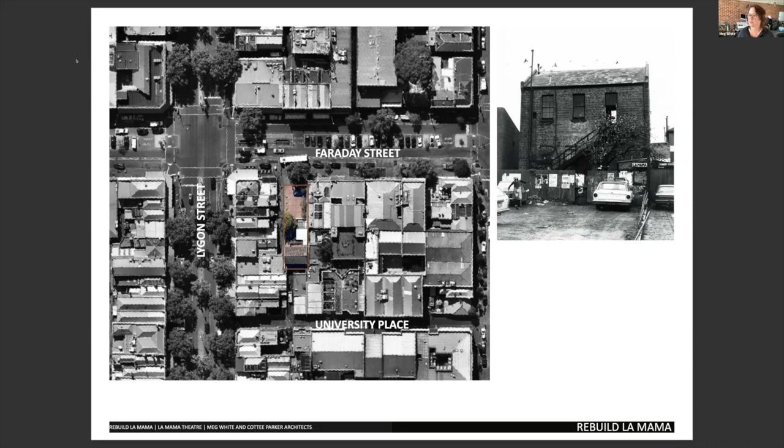Liz Jones, artistic director of La Mama, gave this description of the iconic theatre on the day it was gutted by fire. It's a very small space, but it had a very big history, and it's a very, very important place in the heart of the creative community in Australia.

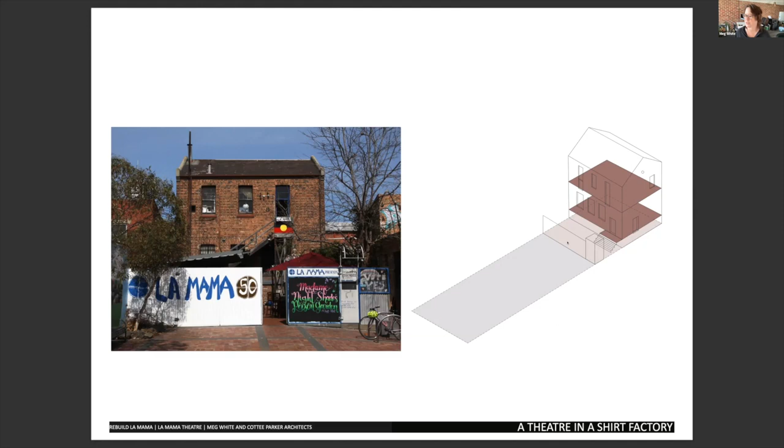A theatre in a shirt factory is an unusual proposition. The small two-storey red brick building has a footprint of just 55 square metres. There was a small courtyard preceding the building. Then in later years, when the community purchased the site, a forecourt was formalised. The ground floor theatre space has 5 doors and 5 windows, a set of stairs, a fireplace and a hatch.

The upstairs space accommodated up to 8 staff, makeup, costume and green room space for untold numbers of performers, technical storage, a dunny and a kitchenette. La Mama has been the home of experimental theatre for more than 50 years. Improbable as it all might seem, this tiny programmatically overloaded footprint has nurtured hundreds of creatives, including writers, directors, actors, designers, technicians, filmmakers and poets.

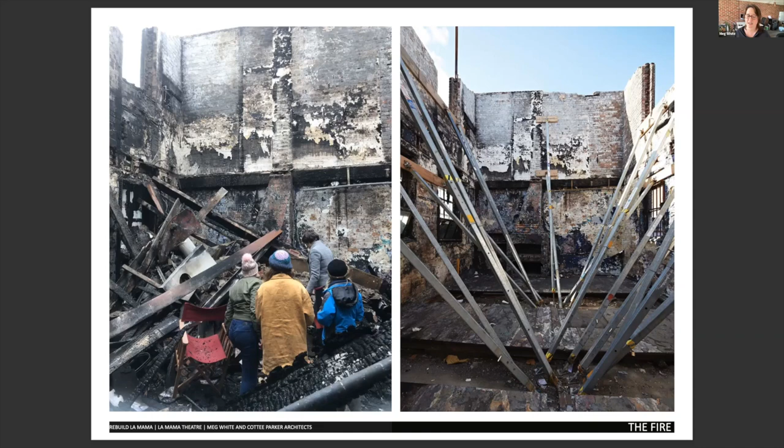In May 2018, this creative engine room was gutted by fire. Very little remained. The loss was devastating to all. There was an immediate decision to rebuild. The regenerative notion of the Banksia releasing its seed for new growth after devastating fire was harnessed. The tragedy slowly revealed itself as an unbidden opportunity to grow and evolve.

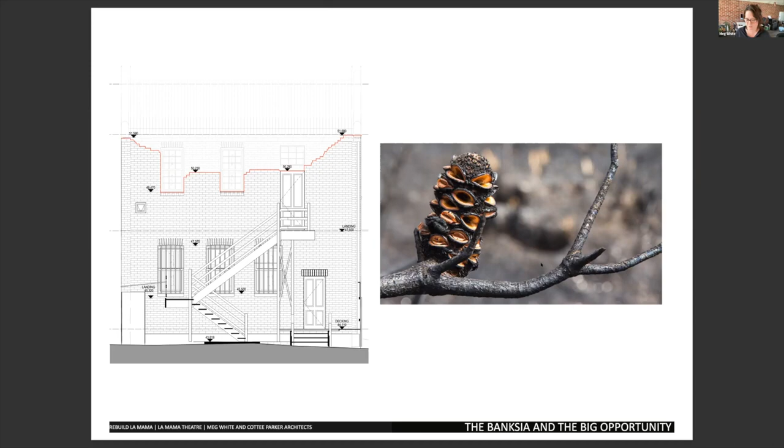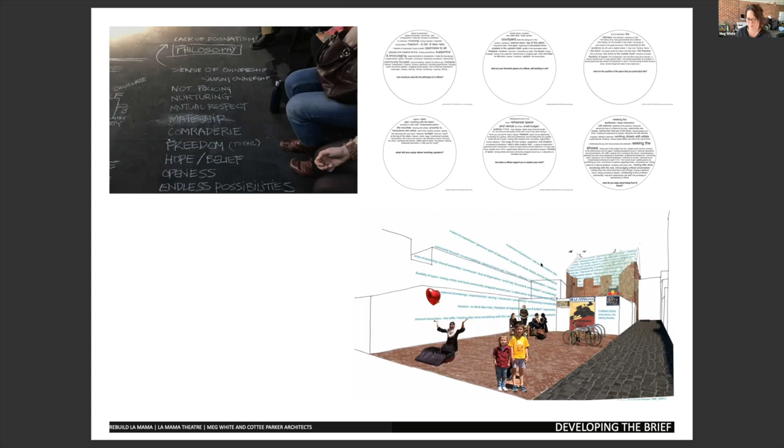The brief was woven from engagements with staff and key La Mama creatives. Responses to questions about the theatre, her spaces, and her philosophy were used to generate a script for the rebuild. The wish list included restoration of the theatre space and building volume, accessibility for all, dedicated office and rehearsal hub, extra spaces and improved amenities for staff, artists and patrons, including 2 DDA toilets, a shower for performers and a kitchen shared between the artists and the staff. Modernised technical facilities, improved box office and storage and planet-friendly initiatives.

The principal design gestures began with extending the theatre entry landing, shown here, into a raised deck across the courtyard. This gesture moves the stairs away from the theatre entry, reducing congestion. A lift to the theatre level sits adjacent to the stairs. A second lift provides access to the first floor for staff and artists.

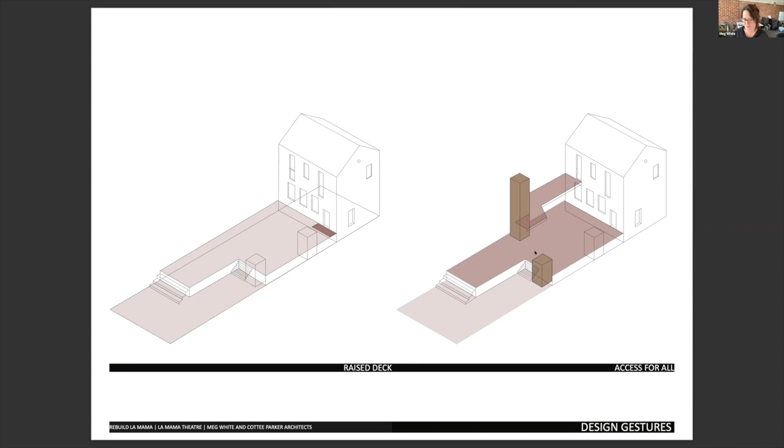Additional spaces include a rehearsal hub and dedicated office in this new volume, and a mezzanine that was tucked up in what would have been the ceiling space in the old building. And of course, that raised deck offered lots of opportunities to tuck services and storage below. A box office sits between, and a bridge link joins and separates the 2 buildings.

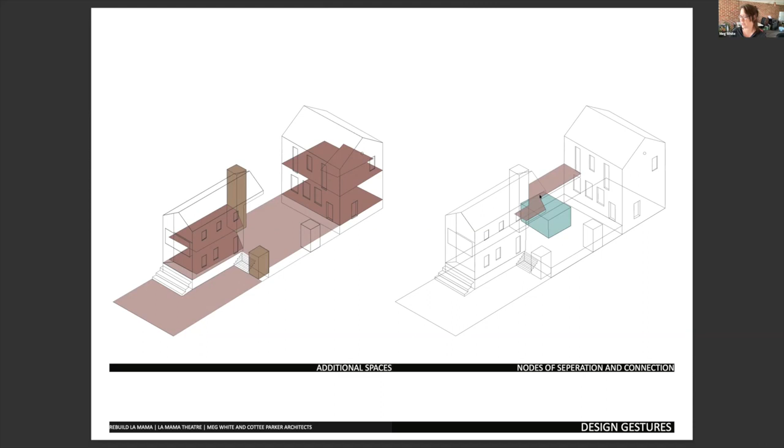The new building is designed as an echo of the original. It is a smaller version of the gabled roof form, rotated 180 degrees and set downstage to allow views through to the old building. You can see a view going there with the entry from the street frontage. The bridge link affords further space for interactions and a veggie patch for supporting healthy shared meals.

For the new building, mottled bricks were selected to reflect the mottled bricks of the old. The charcoal colour was chosen to be recessive, to prioritise views of the old building, which gracefully upstages her. Timber is employed in the form of doors, stairs, handrails and window shutters, the elements which building users engage with daily. For the old building, handmade glazed bricks were selected to supplement the original handmade bricks lost in the fire. These glazed bricks draw the fire line, marking the event.

A generous public forecourt sits at the front of the site. When La Mama is in pre- and post-show mode, the sliding fence can be opened, allowing connection between the forecourt and the raised courtyard, extending this public space. And for larger events, the rehearsal hub can also be opened up to further expand the usable footprint.

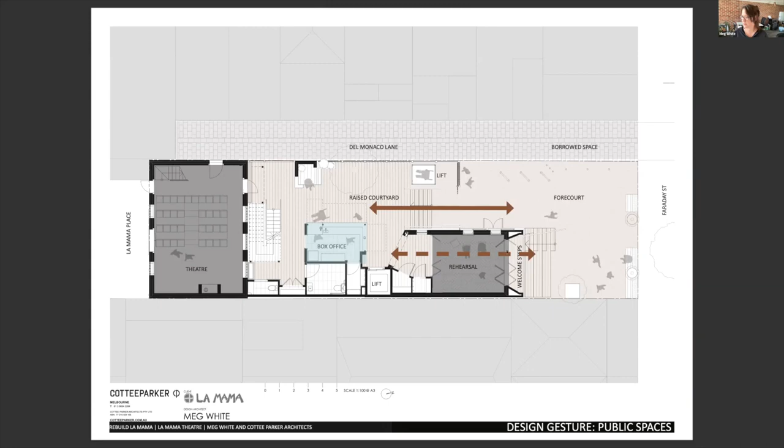The rotation of the familiar form allows for engagement with the treatment of the gable ends. A proscenium arch form is playfully inserted at the end of the rehearsal hub. Adorned with a heavy velvet curtain, this space affords the potential for performances. The welcome steps can be used for performance or seating, or just for lunch breaks and waiting for theatre dates. The raised courtyard provides breakout space to creatives and staff. When the fence is open, interactions can occur here with the potential to spill out into the forecourt.

The box office is located at the heart of the project and is visible from all vantage points, most importantly, the site and theatre entries. The reinterpretation and translation of materials and spaces is a key principle throughout the project. The magically folding corrugated iron fence is reinterpreted as operable awnings to the box office. The interior is lined with salvaged theatre floorboards.

The heritage listed water closet has been partially dismantled and reconfigured as an announcing and performance platform. Floor joists salvaged from the theatre have been made into a raised garden bed. Feature handmade glazed bricks adorn the theatre building above the fire line. The design approach celebrates the personal, the handmade, the reclaimed, and the reinvented. Artists were commissioned to create murals and paintings, make lights and feature fittings.